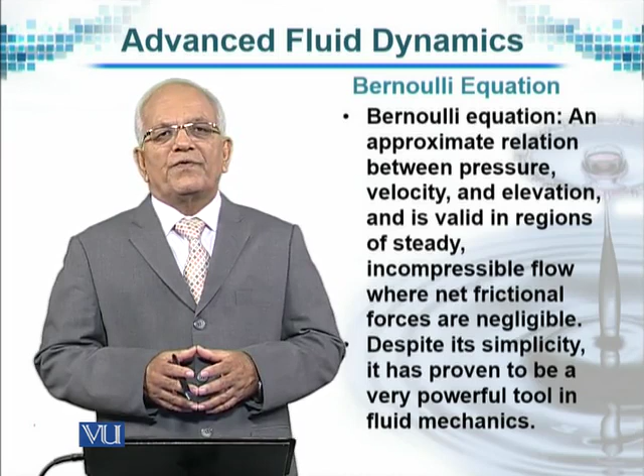You will come across irrigation engineers, hydraulic engineers, or people working with irrigation, canals, and so on. They use it a lot. Despite its simplicity, although the equation in the end is very simple, it has proven to be an extremely powerful tool in fluid mechanics. If it wasn't, we would not be talking so much about it.

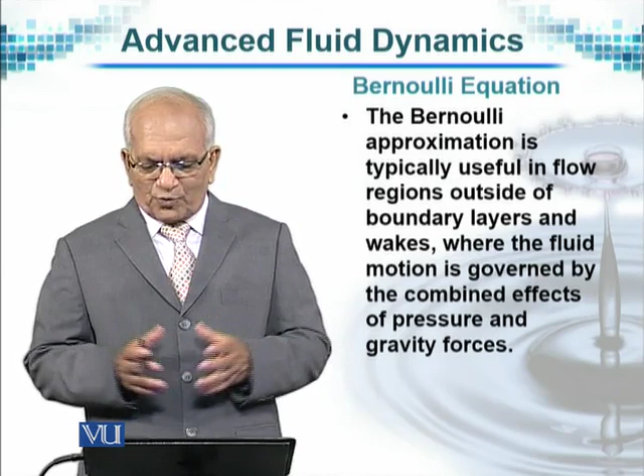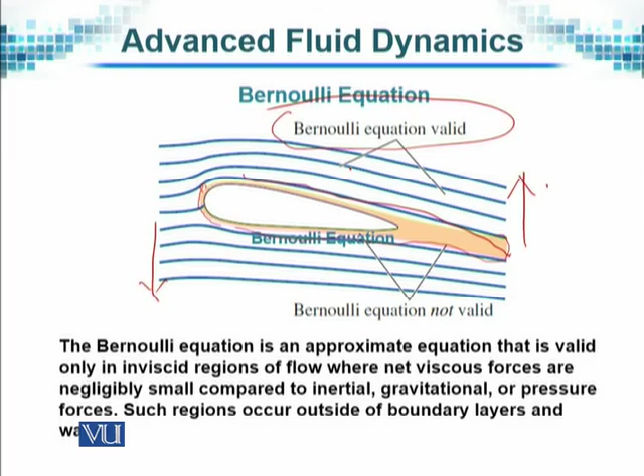But away from the solid body there is no viscosity, and therefore in that region the Bernoulli equation is valid. But within this region, close to the solid body, where the fluid is sticking to it, is where it is not applicable.

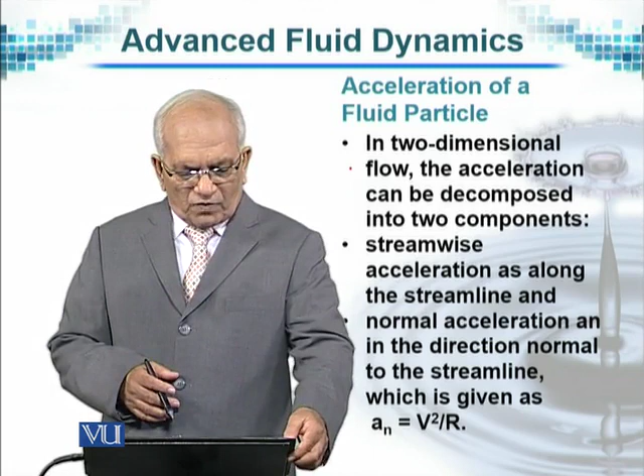Similarly, for acceleration of a particle in a two-dimensional flow, the acceleration can be decomposed into two components. Streamwise acceleration, we have already shown these equations to you, so I will quickly pass through it. And normal acceleration, in the direction normal to the streamline, could be indicated as a_n equals velocity squared over r.

So streamwise acceleration is due to change in speed along a streamline. Acceleration itself is the rate of change of speed. So change of speed has to occur, whether positive or negative, and whether along the streamline or normal to it, the acceleration can exist.

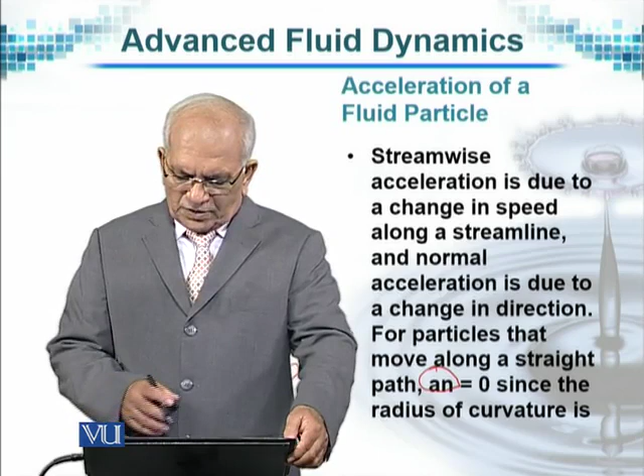For particles that move along a straight line, a_n, read as a with n in the subscript, is equal to zero, since the radius of curvature is infinity, and thus there is no change in that direction as far as acceleration is concerned. The Bernoulli equation results from a force balance along a streamline. So the Bernoulli equation will normally exist along a streamline rather than in the normal direction.

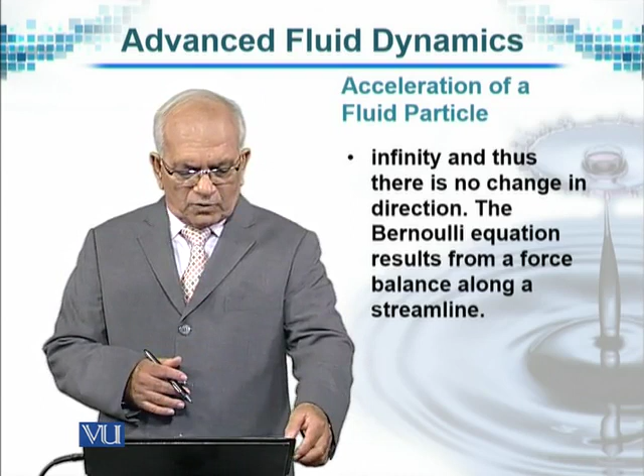If I show the equations, you are familiar with them because we discussed them when talking about the velocity field, the acceleration field, and so on. They are the same equations, only showing how we write them along a surface, so S is used for a surface, and if it is a straight line, a different term is used. For example, along the x-axis it will be x, for y it will be the y direction, for rectangular coordinates, and so on.

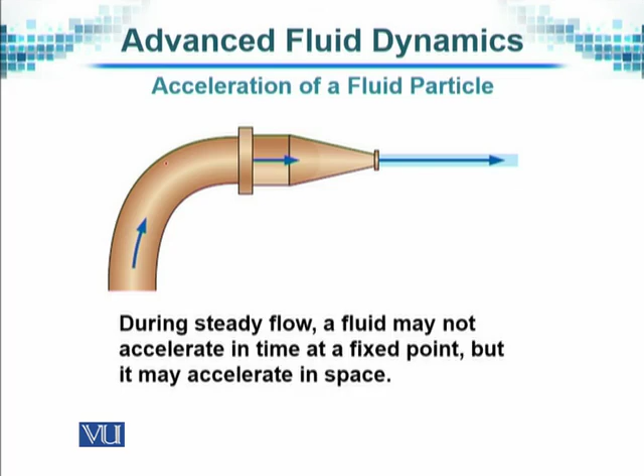So acceleration in steady flow is due to the change of velocity with position. During steady flow, a fluid may not accelerate in time at a fixed point, but it may accelerate in space. This we have already discussed as well.